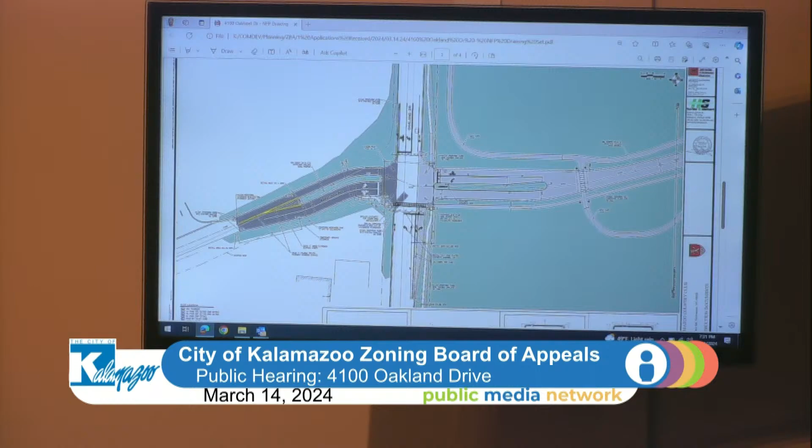The long-range plan is that the existing Country Club facilities accessed off of White's Road will be demolished. The new clubhouse, golf performance center, tennis building, and all the main activity, plus a short course on the parcel just east of Oakland Drive, will bring all that activity and traffic out to Oakland Drive now.

As part of this project, we designed all these improvements and gained site plan approval last year. As you've probably seen, the Country Club buildings and site work are under construction now.

As part of the next phase this year, we want to construct improvements at the Oakland and Angling intersection. To bring this new driveway up to Oakland Drive, we're constructing a new signal. From a safety standpoint, it's important to realign Angling Road so it curves, like many intersections around our area, and comes in at a 90-degree angle.

That's a much safer configuration from a traffic standpoint. Visibility as you're rounding the corners is greatly improved. As part of that, the Country Club has negotiated with Oakwood Bible Church on the south side and purchased a small sliver of right-of-way to make this reconfiguration possible.

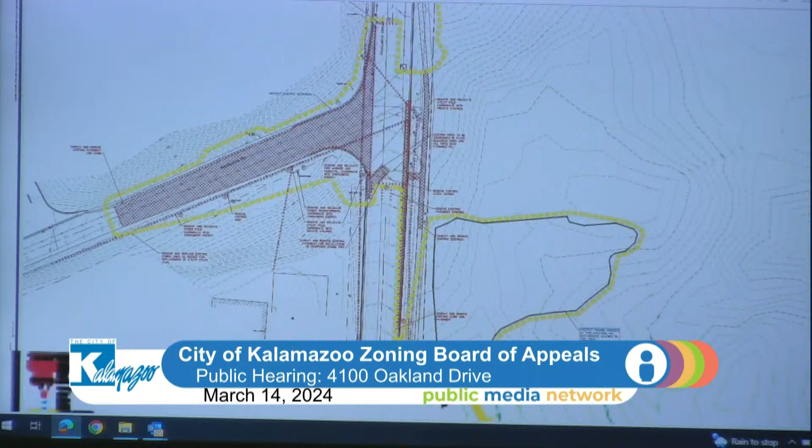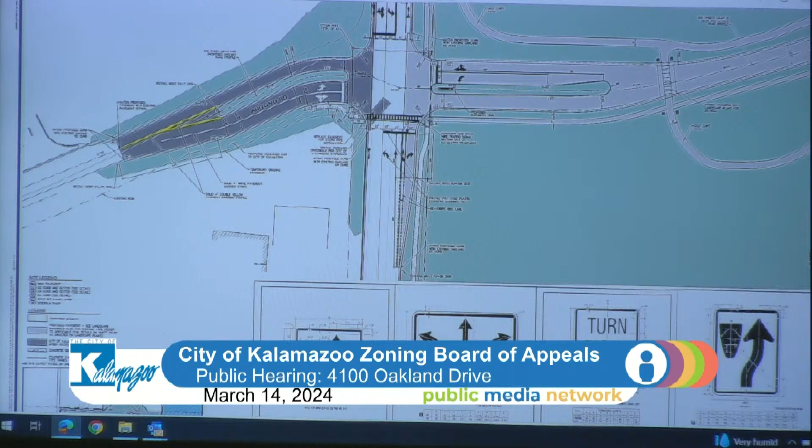We have drawings here. This shows how Angling Road comes into Oakland Drive right now from the west. The red hatching represents what will be removed, and it will be realigned like this, with a short boulevard section. We'll have turn lanes in each direction, or people can go straight across to the Country Club, and there'll be a new traffic signal constructed as well.

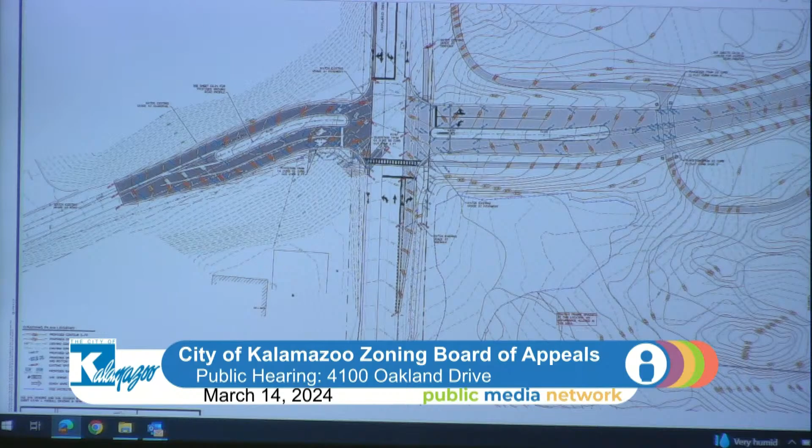This is a grading plan, so there's quite a bit of grade change from south to north through this intersection and also towards the west. We'll be doing some grading. So the purpose of our request is on this first page here.

This page shows the work that will be required. The purple hatch you see are the slopes greater than 20%. To complete this work, there's a little bit of grading needed along this stretch, which will impact 2 small areas protected by the Natural Features Protection Zoning Overlay.

Those areas are right at the corner closest to Oakland Drive and just immediately south of Angling. There's a small section where our blue hatch gets into this purple hatch, and another small section on the very west edge. In total, it's about 0.05 acres of slopes that we're impacting.

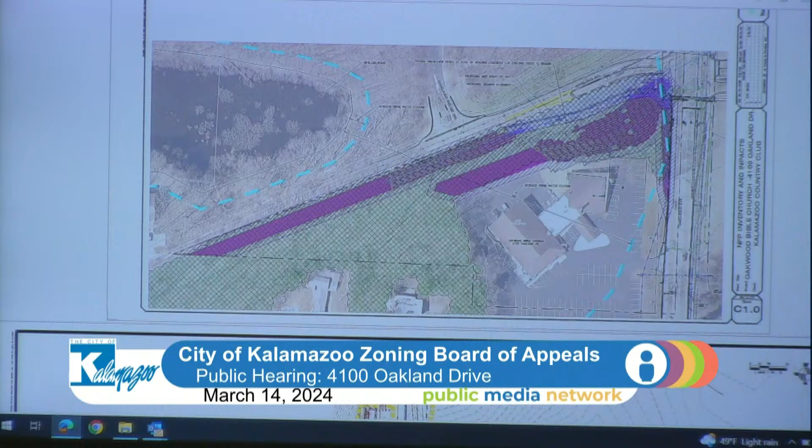As part of the ordinance, there's about 0.03 acres of slope setbacks. We've taken this request to the Natural Features Protection Board already, and they approved it unanimously. We also took this to the city's tree committee, since there are 8 trees within the right-of-way, and they approved that removal as well.

And like I said, we have site plan approval from city staff. So today we just request that you approve our variance request to allow us to complete this work, and it should be moving forward later this year. Available for any questions you may have.

I have a question, because I'm responsible for doing the finding of fact, and I didn't want to cut into your time. You're Mr. Tim Stewart from Hurling Stewart Engineers? Correct. And you had 2 people with you? Yes. John Fulling? Correct. And J.J. Henn? Okay, excellent, those are good questions. Thank you, we may have questions for you later, more than just names. Sounds good, thank you.

Pete, does staff have any comments on this request? Sure, staff's got a few comments to make.

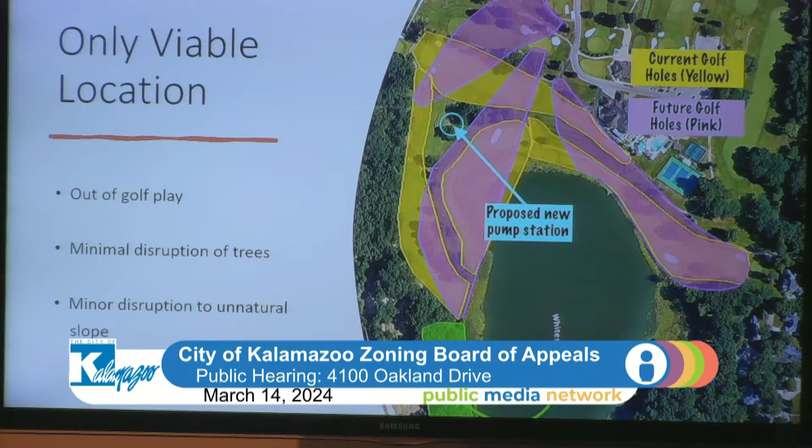But from there, we're able to actually service with the new irrigation both sides of the project in the future. Eventually the first pump station goes away, so we'll still only have one water draw from the lake. Already been working with the state on that as well.

So when we went to the NFP, the reason for this request for variance is this area being close to the lake. There's some slope, and obviously there are trees.

So we went to NFP with a few different options, and we said we can put it down closer to the water, away from the slope and away from the slope setback, or we can go into the slope, which is man-made, only affecting between 500 and 600 square feet. So it's a little building. And we can stay away from the trees, not remove any trees, and not touch the critical root zone of those trees.

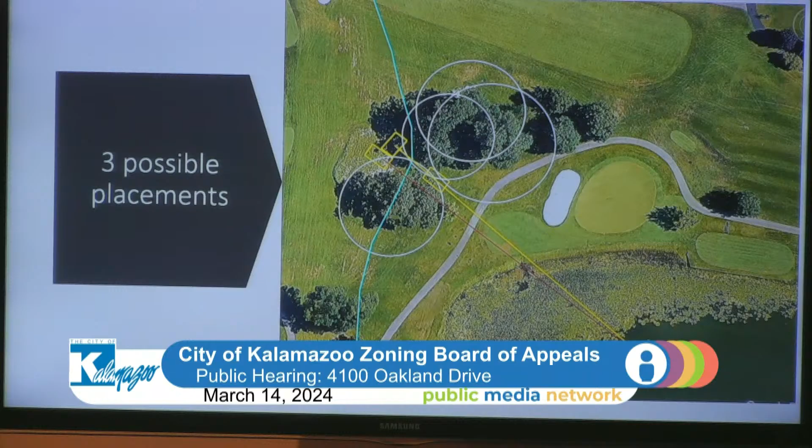And they voted unanimously to have us not affect the trees. Go ahead and put it in the slope. We can manage that. We can manage the surroundings of the buildings, and then stay away from the critical root zone. So that's what it would look like. Those are the trees, and what the circles are the critical root zones.

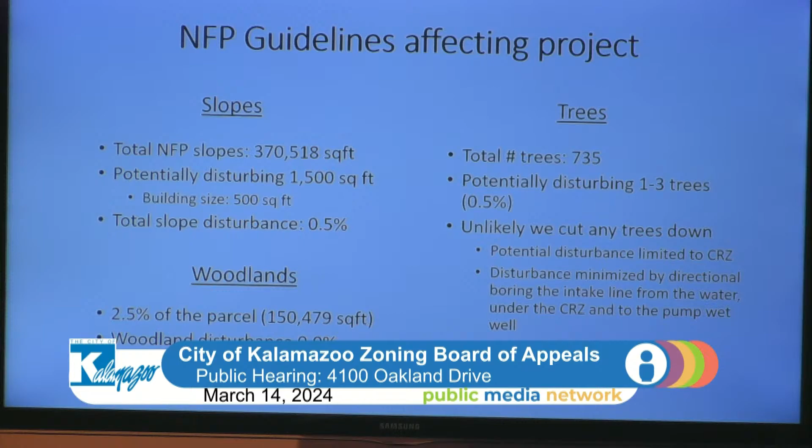This is some of the guideline stuff that we went over. So just perspective of how much we're talking about. Very small.

370,000 total square feet of slope on that side. We're potentially disturbing 1,500 square feet, but the building is really only about 500 square feet, 0.5%. Just some general, 2.5% of the property, now we're talking 150,479 square feet, is woodland. None of that is touched. And we have 735 total trees.

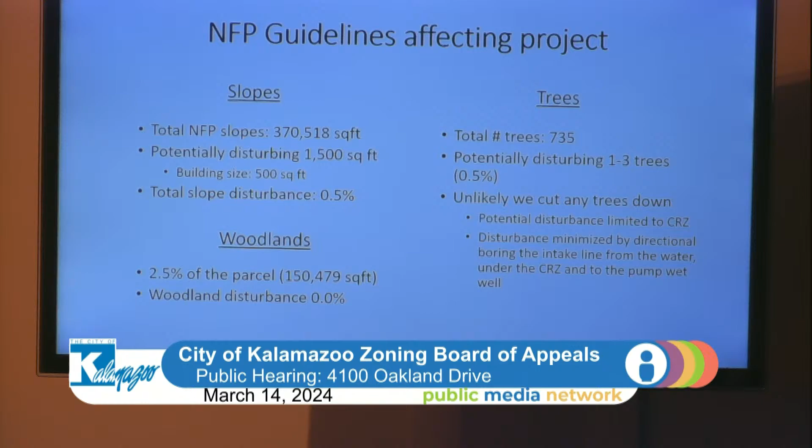Potentially disturbing 1 to 3, that was before we moved it. That was the slide from the NFP. We decided to keep it out of the critical root zone, so that will be zero now if this is approved. And we won't cut any trees down if it's approved here tonight, to where the NFP approved it to go.

We also discussed the intake that has to go from the lake into the pump station, and we checked with our contractor. We are going to directional bore a 24-inch pipe. They can do that. The reason for going that way is to not disturb any of the soil along the lakeshore. We don't want to dig, right? You never want to dig along a lake. So they can directional bore underneath, out into the water, all the way to the pump station, which will actually keep that pipe under the critical root zones as well.

So, more expensive option, but a much better option. And the state likes that too, right? All right, so these again, critical root zones, all right.

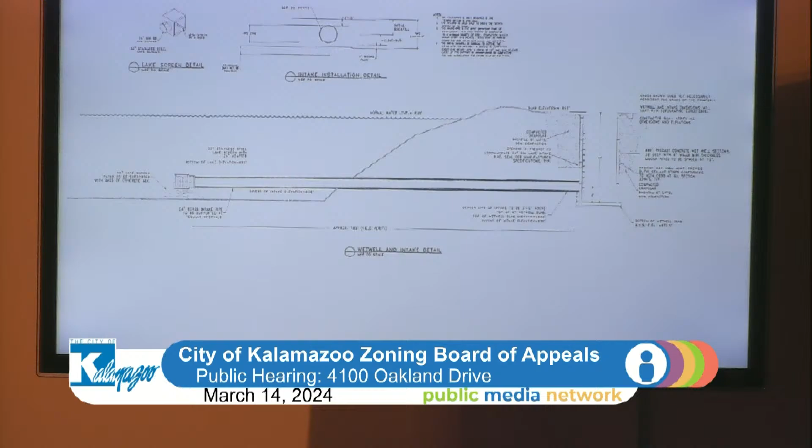Little side view. That's it. So that's it. Thank you. Thank you.